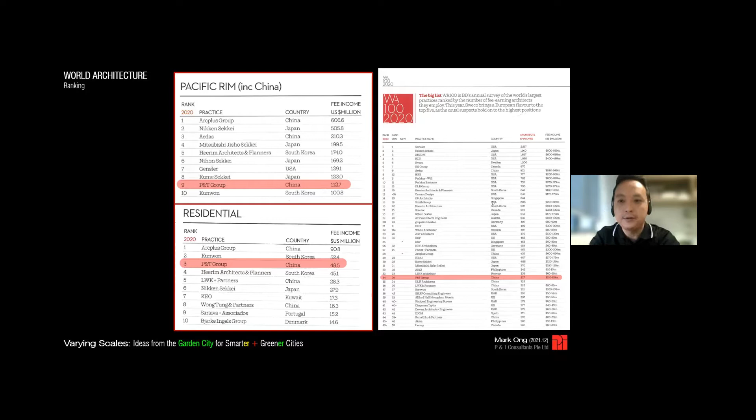So then I think with that, I'd like to start first with ideas about the city. In talking about ideas for the city, I'd like to break it down according to a few different categories. First, how we define the city.

I'd like to talk about my dirty D word. Then third, since we're doing all of this build right now in the Philippines, it's good to ask build what.

In discussing the identity of the city, I'd like to touch a little bit about heritage and identity. To start, I'd like to do a quick comparison between Singapore and Manila, starting with a question I get asked all the time.

The question is: totoo ba na ang Singapore ay kasing laki lang ng Quezon City? The answer is no. Singapore is bigger than the entire Metro Manila. What I tell people is that if you take Metro Manila and rotate it 90 degrees, you get something of compatible size to Singapore. But if you add parts of Laguna, Cavite, Bulacan, and so forth, where many people commute for work and school, it won't be difficult to put together a land area compatible to Singapore, which is nearly 720 square kilometers.

Singapore has a population of 5.7 million people, giving a density of about 7,900 people per square kilometer. That's a planar scale of measurement. If you reverse the math, you get the architectural scale: 126 square meters per person, or approximately the size of a 4-bedroom apartment by Singapore standards.

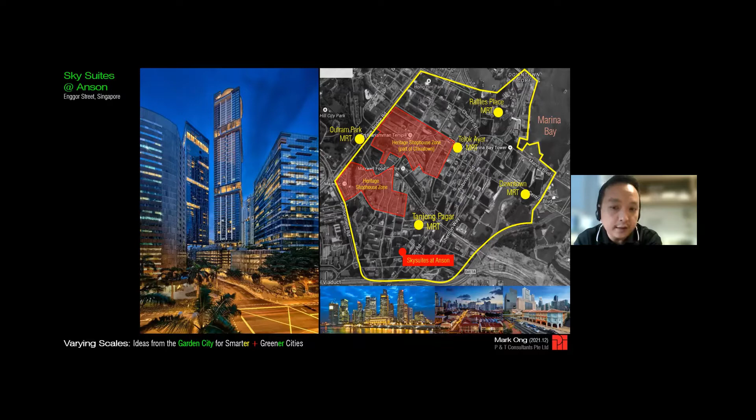So what we did was, at street level, the tower actually sits on a car park podium, which hugs the street. And what we did was we carved out one of the podium's corners to create a welcome space at ground level.

And above, we made the critical decision to rotate the tower. So the tower is rotated at a different axis from that of the podium. And we did it for the purpose of three key objectives.

The first was to give the tower's residential units a north-south orientation, no direct afternoon or morning sun. Second, to tilt the views of the tower to face the best views. And the third is to give the tower a stronger presence on the main road.

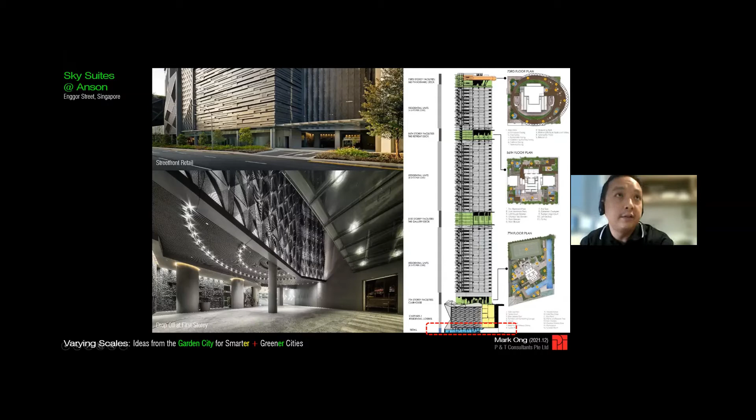Now, because of the tower's height, it's 72 stories, we designed the whole tower in section. So the whole first story is basically retail and F&B at the street in a drop-off porch.

And then at the amenity deck, we basically fit in as many amenities as we could. So we were able to fit in a 50-meter Olympic length pool. We were also able to fit in a tennis court.

And then as you go up, we basically start to introduce things like gardens, lounges, jacuzzi, spa, and basically all sorts of public areas for the residents to enjoy.

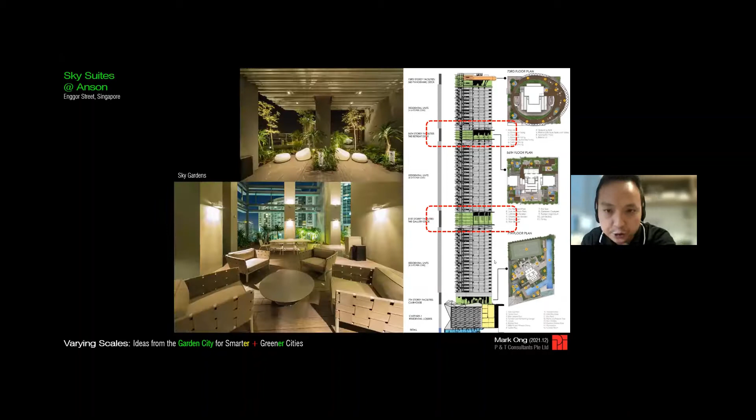And on top, we clipped this flying saucer-shaped viewing deck to allow residents a 360-degree view of the city, which is the perfect spot to watch the fireworks on National Day, on New Year's Eve, or on Formula One weekend at Marina Bay, or even some of the attractions in Sentosa Island.

So it was a project for us that was about finding the right balance of providing an enriching living experience on a human scale for the residents, but also about how such a large and tall architectural object behaves while it is around its neighbors.

Okay, so the next thing about the city is build, build, build, build, build what? We're now in this mode of build, build, build, right? So we're building roads, bridges, airports, and so forth. So I would also like to make a few suggestions of what else we can build.

And here's my first suggestion. I think we should build more parks. And I'm not just talking about building parks that tourists will visit, like Gardens by the Bay or Botanic Gardens or Bukit Timah Reservoir we have. I'm not just talking about parks like this.

I'm also talking about parks integrated with affordable housing neighborhoods. So this is Bishan Ang Mo Kio Park, right next to a public housing estate.

And it's fitted with playgrounds, outdoor and fitness equipment for adults and the elderly. What's happened is that these parks are now a regular weekend destination for families. Who says that every weekend must be spent in an air-conditioned shopping mall?

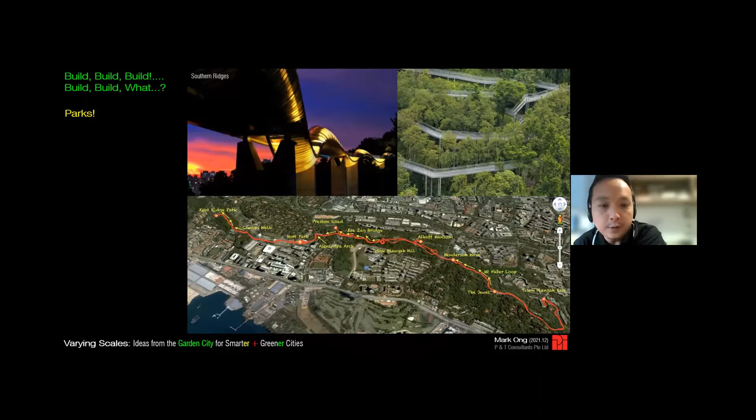In the Philippines, these are the kinds of areas we can't just leave behind. We just build subdivisions in places like this, and then later on it's the poor residents who have to suffer the consequences with flooding and all these issues. I think areas like this in our city should just be left for nature to take its course, and we can build a few things here and there to turn them into public amenities for residents to enjoy.

Yesterday, just last weekend, I was in a taxi, and the cab driver told me that to get the animals to cross, they actually took urine samples from animals in the zoo and sprinkled it on this bridge, so that animals from one side of the reserve would feel free and safe that this is really a place for animals, and they'll just go ahead and cross.

Now, why am I talking about this? These discussions on parks and public amenities remind me of one of our recently completed projects, the German European School Singapore. The school was planned around two key areas: one is a sports and recreation area, and the other is the academic block to the west.

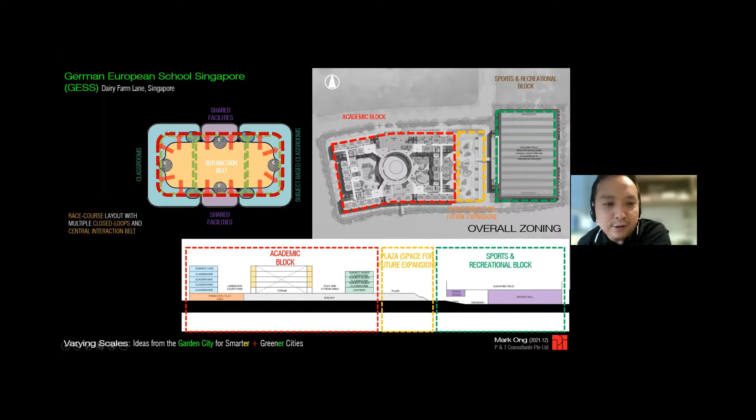I think the most interesting part of how we designed the academic block is that we used a shopping center's race course plan to inspire the design. By doing that, it allowed us to carve out a large central atrium to create a series of courtyards. Right smack in the middle, we call this space the forum, which is the main gathering space for the children. The other courtyards are used as play areas, fitted with playground equipment suitable for each courtyard, with equipment for children of different ages, creating a natural separation of children.

Now, why am I discussing this project while talking about building more parks? Here's an interesting story. When we completed this project, before it was handed over, we organized an Archi tour for staff to tour the school. One of my office mates, a colleague named Abhishek, turned up late, arriving on site sweaty and breathing heavily. I asked him a rhetorical question: what, you ran here from home, is it? To my absolute shock, he said, yes, I got lost a bit, but that's why I'm late.

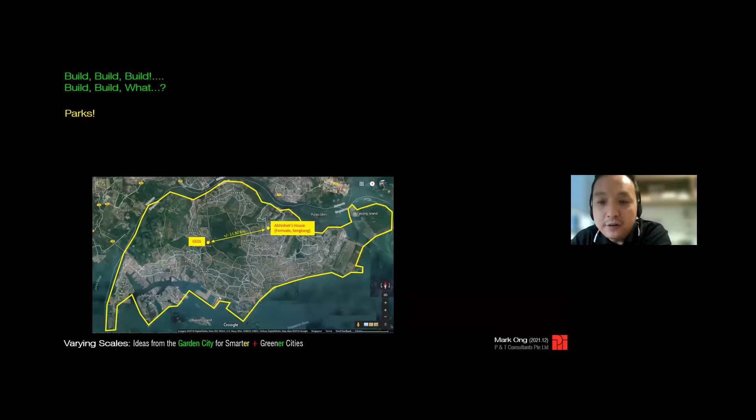Now, here's why this is a shock. To give you an idea, he jogged basically 11.8 kilometers from his house to the school. For reference, that's longer than the distance from Rizal Park to Quezon Circle. On hindsight, the thought of somebody jogging 11.8 kilometers would only probably shock an overweight person like myself.

But what is impressive was how the city enabled him to do this, because all of the city's parks are linked together by a network of park connectors, ensuring that every single home has access to green space. And it doesn't just end there. Schools like GESS, an exclusive international school, open their doors to local community groups for the use of their facilities, including their swimming pool and sports fields. In Singapore, public schools also open their gymnasiums for people to play basketball, badminton, and so forth.

By doing this, the entire island, the entire city effectively becomes a single giant fitness circuit.

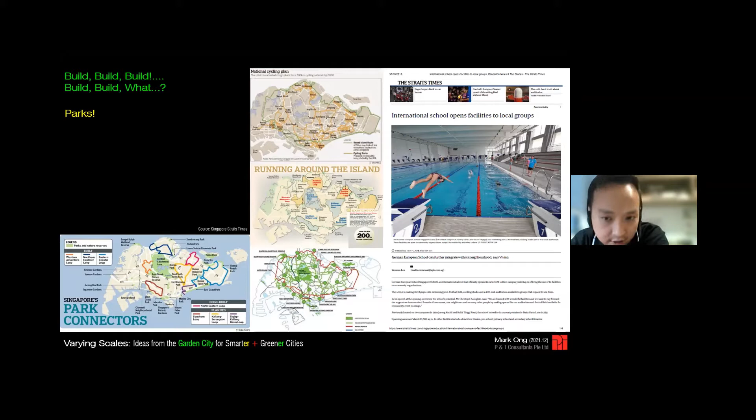So the next thing about build, build, build, to introduce the next idea on what to build next, I'd like to start by bastardizing a question I heard from an Australian architect many years back. I apologize that I don't remember his name, but I remember very distinctly the question he asked.

Which is a more sustainable mode of transport, a Prius or a Hummer? Most of us will automatically go for the Prius. But the Prius has many patented parts that come from different parts of the world to be assembled, while all of the Hummer's parts come from within a small number of kilometers from its factory. The Prius has a shorter lifespan, say 5 to 7 years, while the Hummer is built to last much longer. So really, what is the more sustainable mode of transport?

It was a trick question, of course. The answer is a bicycle. Joke lang, baka ang tatak ng bicycle is Hummer. But that's the next point I wish to make about what next to build and what next for us to aspire to build.

Which is a car-light society. In Singapore, we are aspiring to this as the government has already announced a zero car growth policy, which means we are no longer allowed to have any more cars than the number we currently have in Singapore. Because at the end of the day, this is what we are aspiring to: a developed country is not a place where the poor have cars, it is where the rich ride public transportation.

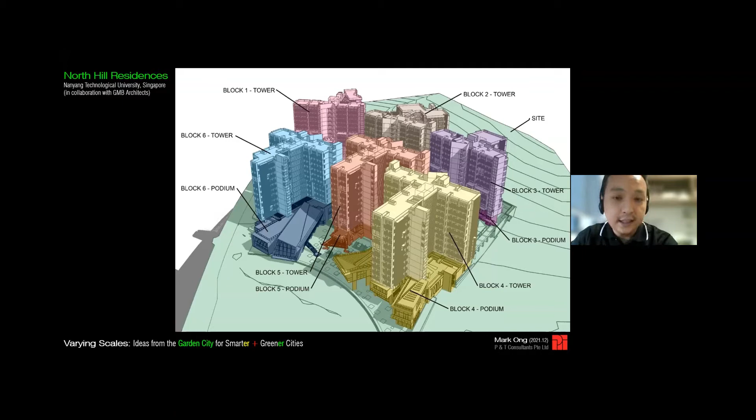The site was on sloping ground, and this is where the usage of BIM, building information modeling, as a design tool came in. How do we set the podium on the ground? What is the ideal platform level? When we use BIM as a design tool, not just for documentation, we are able to get real-time information from an architectural, civil, structural, and cost point of view on the implications of the different scenarios we explored. We are able to use this real-time information to guide the client to make these critical decisions.

Then what we did was we took the BIM model and ran it through computational fluid dynamics, or CFD, to test how the scheme responded to things like wind flow. And thus we adjusted the plans as needed to get the optimal ventilation outcomes.

When you work in BIM, it also allows you, together with your consultants, to know who really understands the project or not, who has errors in their drafting and who does not. You can find these clashes during the design stage through virtual design and construction, rather than finding out during construction itself, and later having conflicts on site.

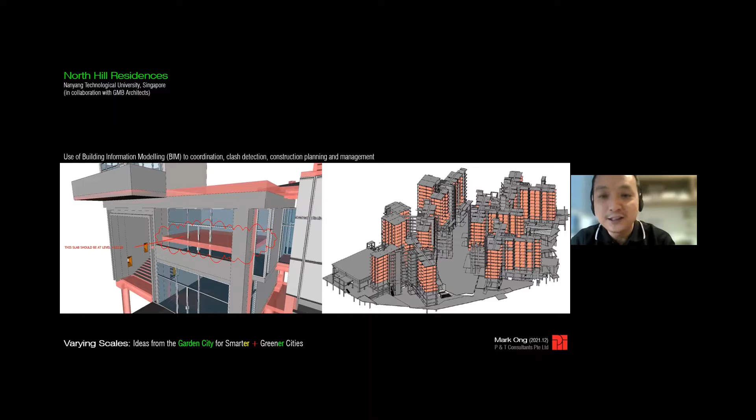So for NTU, North Hill also became the first ever application of prefabricated, pre-finished volumetric construction in Singapore, or PPVC, which is a form of DFMA.

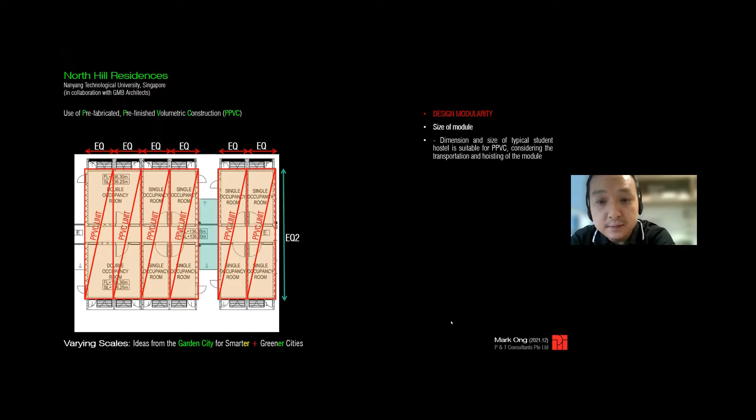But for the student apartments, we used steel PPVC, so all of these were done in steel modules. We designed the accommodation in modules, with a double occupancy room designed as a combined module of 2 single occupancy rooms. The main consideration was that each module would be within a certain size, so that we could fit it at the back of a truck, and when it's transported from a barge, if it comes by ship, or from a warehouse, we need to transport it through Singapore's roads.

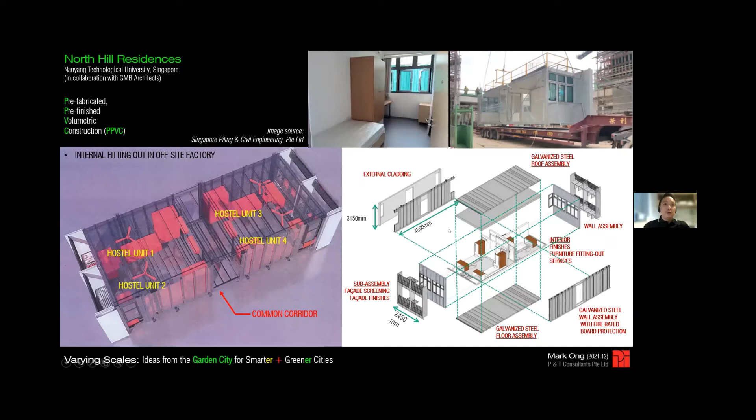We don't make it too big, so you avoid having to involve a police escort to bring the components down to the construction site. When you work like this, your construction drawings begin to resemble furniture assembly instructions. I understand the Philippines has joined the IKEA club, so those who've purchased furniture from IKEA will recognize assembly instructions that resemble this.

So these are the modules. When they come onto site, they're literally brought in three-dimensionally, completely finished with windows, cladding, floor finishes, wall finishes, and so forth. They are lifted into place with high capacity cranes. And when they're assembled, they look like this.

This is steel PPVC. Today, almost all PPVC projects in Singapore are done in concrete. I will be showing you an example of these types of projects later.

Now, 11% of global CO2 emissions come from building materials and construction. If we take a look at how buildings are made the conventional way, this is roughly how it looks. You take your materials.

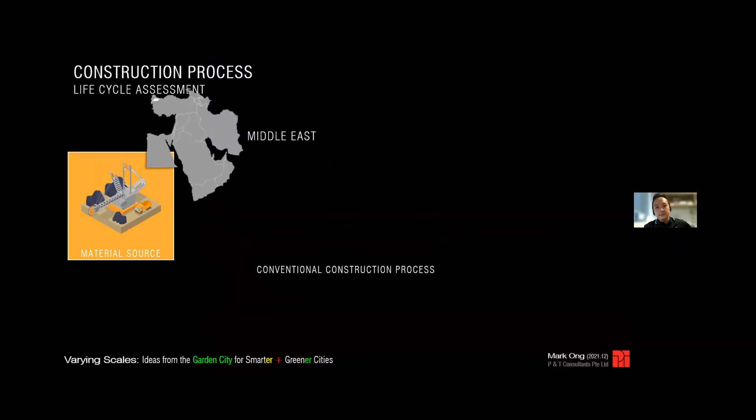In the case of Singapore, we take aggregates from the Middle East or Indonesia, and they are brought in by freight to Singapore. They need to be stored in warehouses, then transported to site, and finally you basically piece them together on a construction site. This, of course, results in things like noise and dust pollution, and a lot of wastage from auxiliary material.

Now, if you use PPVC construction, you're essentially replacing the material source with a singular overseas production process by creating the modules in one area. You normally get these parts made in Malaysia or China. In the projects we do here in Singapore, the PPVC components normally come from Malaysia or China.

You basically still need to do all of these things, but what it effectively does is drastically reduce the amount of noise and dust pollution that you have.

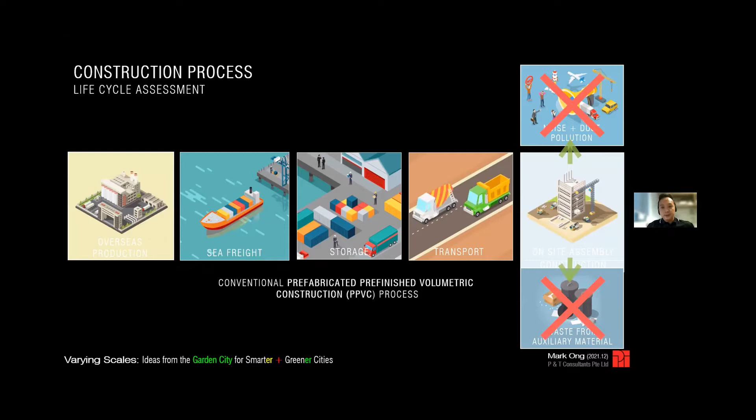So it is here where the Integrated Construction and Prefabrication Hub, or ICPH, comes in. This was our opportunity at P&T to participate in the transformation of the building construction industry towards a smarter and greener way of building.

In Singapore, our equivalent to LEED is called Green Mark. Buildings need to be either certified, or if you want to go higher, you can go for gold, or gold plus. I'm proud to say that ICPH has achieved an even higher platform. We've achieved platinum. Thus, we've called ICPH a green building to make other green buildings.

So let me just show you a quick video of what happens in this little factory.

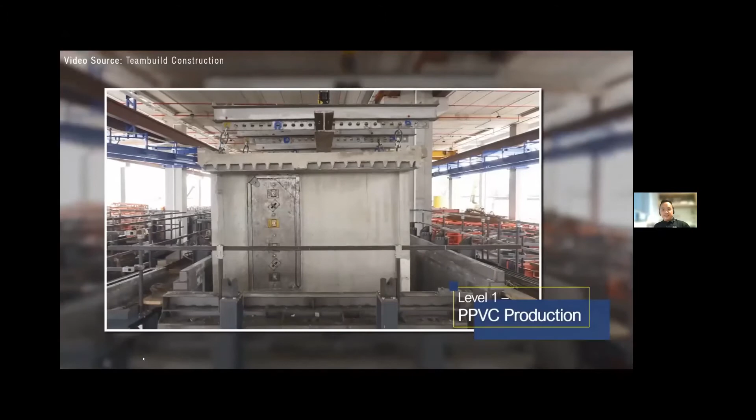So that's what happens inside the factory. You can see all the modules. NTU was done in steel.

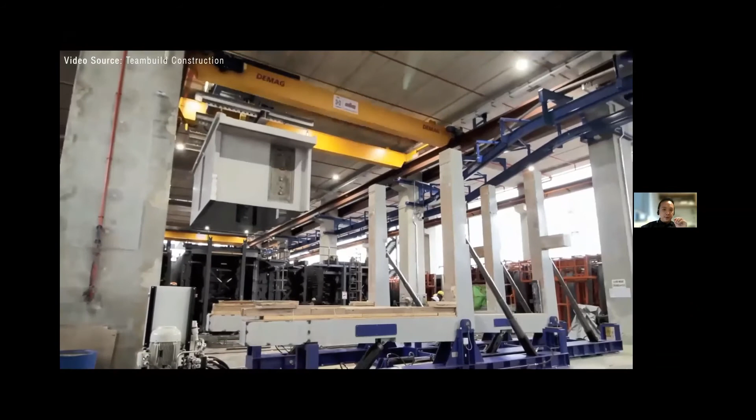Now everything in this factory is fully automated using hoists. Everything is done casting in concrete. The modules you can see are completely done three-dimensionally. We use gantry cranes, not too different from the ones you see in shipping, to transport each of the components from one part of the factory to the other. You can see here, these are three-dimensional rooms already built on a conveyor system.

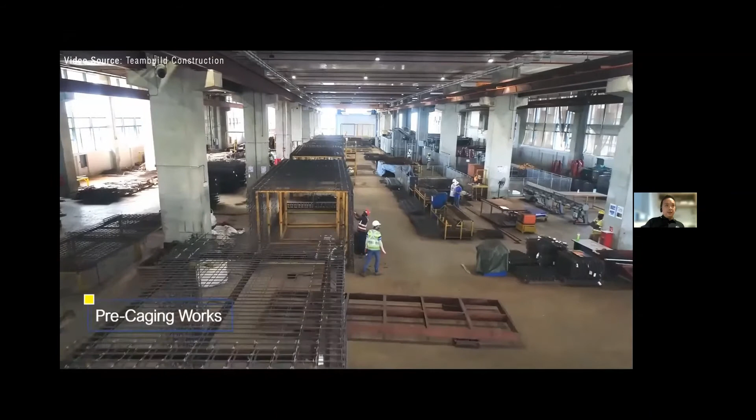And the whole thing is also done, even things like tiling is all done within the same factory, all under a single roof. Structural works like caging and so forth. And this is what the warehouse looks like.

So we had talked about earlier on controlling the size of the modules. You can see that it's almost like a library of these concrete parts, and that's how they're basically brought on from here. As it comes out of the semi-outdoor space, it's actually hoisted to the back of the truck.

Therefore, in a post-ICPH era, once you have enough of these built, we can have a much more self-sustained building construction industry. That's what we're trying to achieve with PPVC and ICPH.

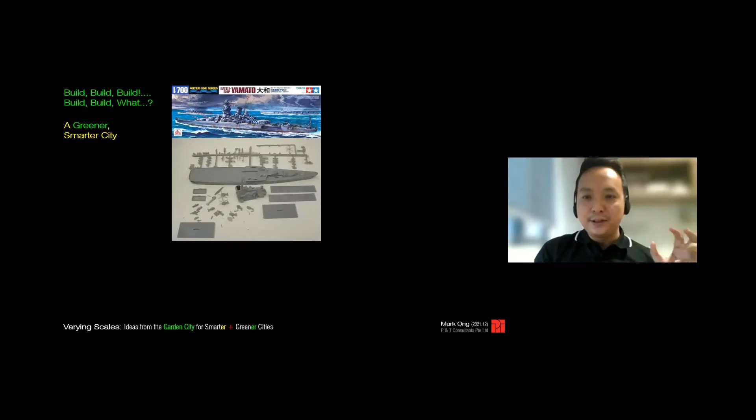Now, when I show PPVC to people, the first thing people say is, wow, parang Lego. I do think, though, that PPVC is more similar to those battleship model kits that I used to build as a kid, where you have all these pre-built, pre-assembled parts. You bring it, and then you basically assemble it for your final product.

There is another form of DFMA method, which is much more, in my opinion, similar to Lego, called mass engineered timber. Basically you have a single material, which in this case is timber, and it comes in various shapes and sizes. Then you take this and assemble it into your final product.

Now I'll show the video. In 2014, we found ourselves with the unique opportunity to use this technology on a small building for a public housing site - just a drop-off porch with a residents' committee center, that's the equivalent of a barangay hall, GFA not more than 200 square meters. The video you're watching right now is basically the 6-week span it took to build it.

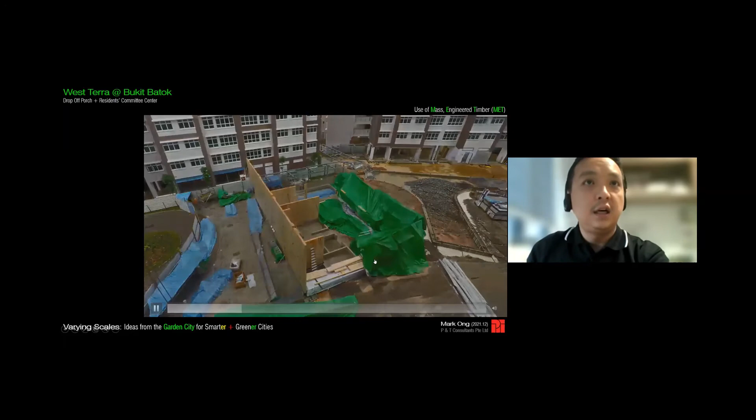You can see there, the walls, the columns are all done using timber. It's still sitting on a concrete bed, okay?

So even the beams, if you fast forward now, you can see the beams there - they're all also done in timber. And then as you cover it up, the roof is also done in timber, but of course we have to cover it up with waterproofing before we put a proper metal roof. Sidings are also done waterproofed and so forth. So it took about 6 weeks to build this.

It was almost in a way our little learning experiment using this building technology. And then a year later, we got the chance for its full application for a 5-story community center.

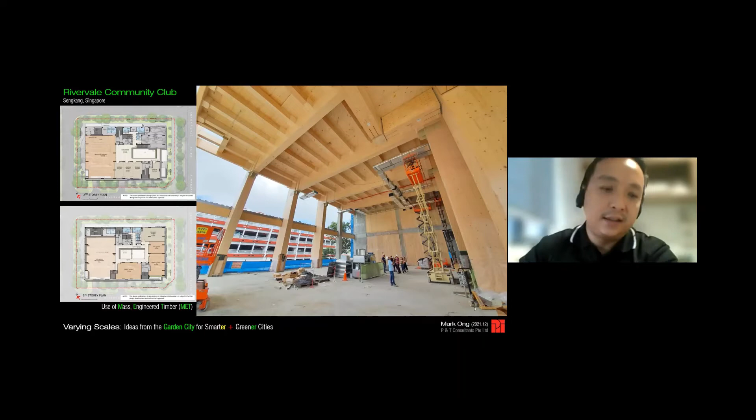The brief included very long spans and high volumes to accommodate a multi-purpose hall that on a typical day, people normally book to play badminton, or sometimes use to hold wedding ceremonies and things like that. So one of the key things for us was to be sensitive about how to apply or use the technology in the local context.

Our supplier was from Europe, Austria, and we were building in a tropical context. So we took measures to ensure no timber members would have contact with the ground - you can see the entire first story and the basement was completely done in concrete. But because timber was also a combustible material, we also had to adapt the technology to local fire codes, so all exit staircases were also done in concrete.

So you actually had a building with a lot of interesting interfaces between this material and the structure that's in concrete, and we learned a lot of lessons. This is the building as it was coming under construction, and this is actually the first talk where I can show the completed photograph of the project - previous talks I could only give the construction photo. We completed it thereabouts during the pandemic.

Here are the spaces internally where we also try to celebrate the material - you can see we expose it as much as possible. This is that double volume long span structure I talked about, with retractable seats on one side since it's also used as a multi-purpose hall by the community center. These are technologies we've been experimenting with, to try to build greener, more sustainable, and smarter here in Singapore.

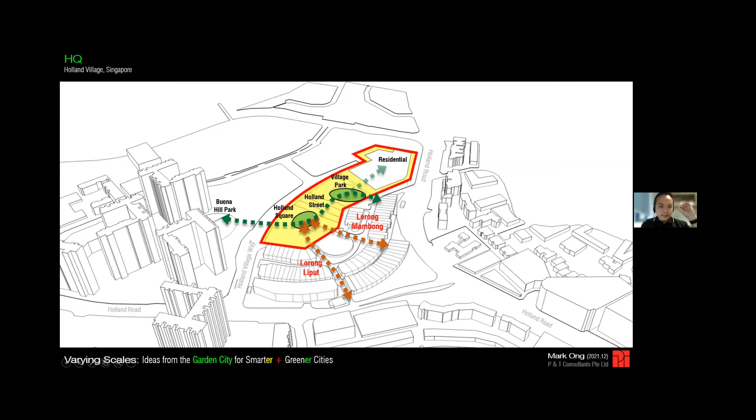One we thought about as a plaza, the other as a park, and then we linked it with an internal pedestrian street. We wanted to replicate the scale, proportion, and streetscape of the existing Holland Village and extend it into the site.

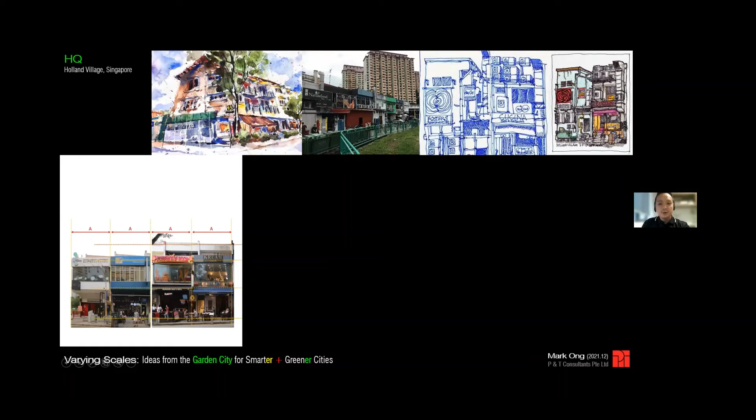So what does this thing look like? The buildings in Holland Village had this charming messiness—each shop had its own look and character. If you take a look, they're all different, not unlike the places I mentioned. So we wanted to do something similar: similar scale and proportions, but applying different materials so it feels very rich. We called it a beautiful mess.

We wanted these spaces and streets to integrate and merge with landscape, so above the shop houses we introduced greenery. And since you still need to fill in all the area requirements from the client, we sat all of the big items above. So the key idea was to take the vibrancy of the streets of Holland Village and apply it into our own site.

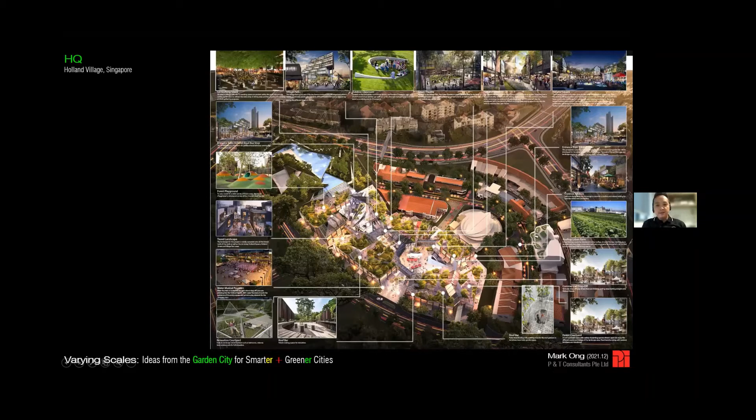We thought about how places like the public plaza would be used at different times of the day—during the day, and then at night you can have things like light, bring the food trucks in, so it becomes a much more vibrant place. The park works one way during the day, then differently at night.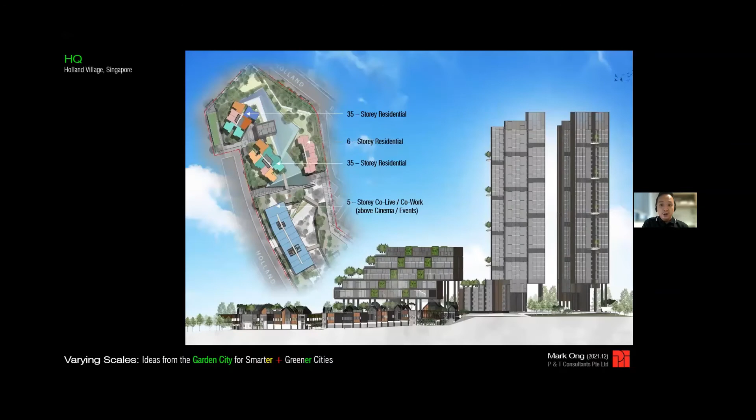You still can't run away from the fact that you need all of these big commercial spaces, so we put them up on stilts. The idea was that you'd have fine-grained 2-story shop houses below, with the coarser big box items basically hovering above.

We tried to shape and sculpt the massing of these buildings. For example, this big box contained theater, event spaces, co-live and co-work spaces, and we made the effort to create a terracing form where you can use it as outdoor meeting areas for the co-work spaces, break areas, and so forth.

When you link all of the roofs of these shop houses together, we also proposed a bridge that went across the street and linked to the adjacent hill park. Here you can also see we tried to apply a similar principle for the residential towers, where they're lifted up off the ground to allow the landscape to crawl underneath.

Next, I'd like to talk about the town scale, where I'd like to talk about housing. We've done quite a bit of work in public housing over the past 10 years, and the way these towns respond to what I like to call the greens and the blues.

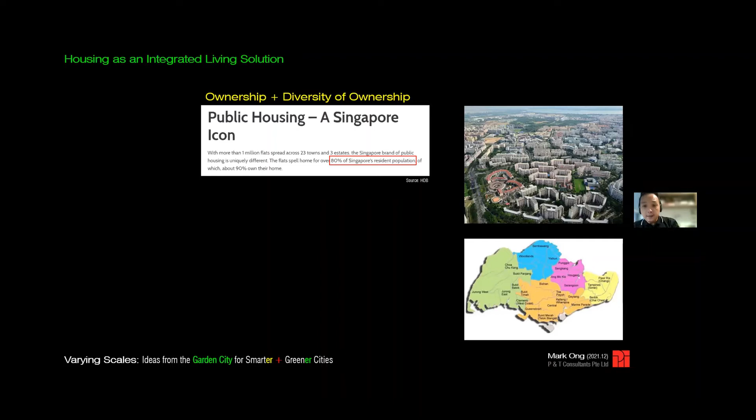I like to tell visitors who come to Singapore that places like Orchard Road and Marina Bay, that's not the real Singapore. The real Singapore can be found in the HDB towns, developed by the Housing and Development Board, Singapore's public housing agency. In 60 years, they have developed 23 towns all over Singapore, and within these 23 towns, more than 80% of Singapore's resident population live. Singapore has the third highest home ownership rate in the world, of which more than 80% is public housing — it is impossible to deny what an achievement that is.

For Singapore, public housing has been transformative both to the development of the city and the building of the nation. One of the key points I wish to make regarding housing in Singapore is how it is viewed as an integrated living solution.

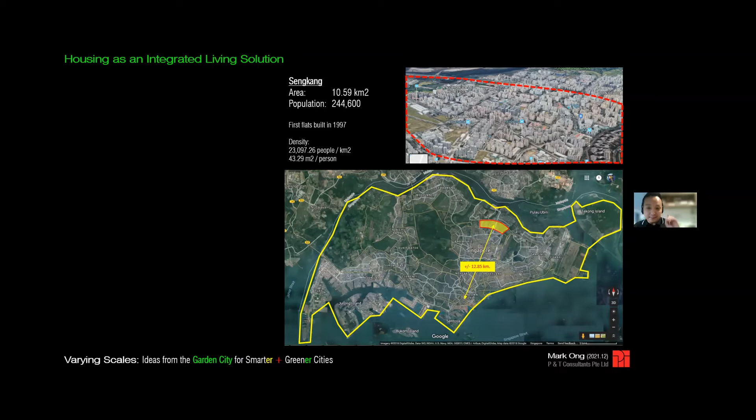To illustrate this point, let me share about the town I live in, from where I'm doing this webinar. It's in a town in the northeast of Singapore called Sengkang, about 12.85 kilometers from the downtown core. The density of Sengkang works out to about 43 plus square meters per person — remember, I said Manila is about 48 square meters per person. For reference, it's comparable to projects 6 to 8 in Quezon City in its distance to the CBD. Here is Sengkang side by side with Quezon City project 6 to 8 — comparable in size and distance.

Now, let me illustrate what I mean by the integrated living solution. Amongst the different types of housing in this town — public, private apartments, landed houses, etc. — here's how it's been planned. Here's the boundary of the town.

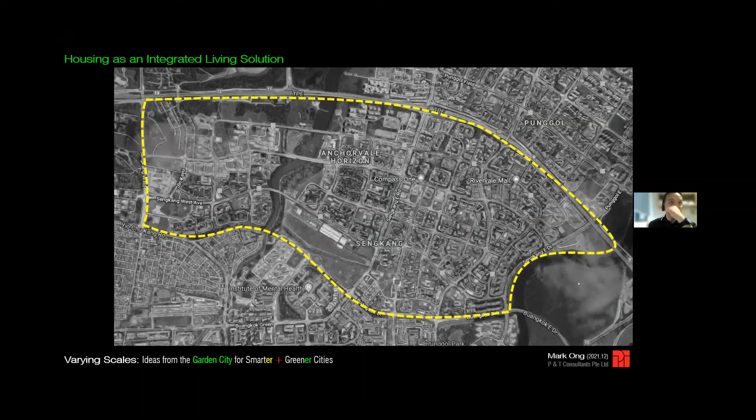You have an MRT line running north-south through the town, with the train station in the middle, and a light rail network that serves the entire town. Then you have the rivers and waterways, maintained by the Public Utilities Board. You have parks, many of which are next to the rivers, maintained by the National Parks Board. You have public schools, secondary and primary.

You have a library, and another set of green spaces managed by the Housing and Development Board. You have community centers — I was showing you Rivervale a while ago, this is where Rivervale is. You have a hospital, then places of worship — Chinese temples, Indian temples, churches for Christians, because Singapore is a multi-religious society. And then you have neighborhood centers where you can get daily provisions like supermarkets, places to eat, and so on.

This illustrates the idea of housing in Singapore. The idea of housing should not be just about pabahay — fundamentally, it should be about pabuhay. It should answer questions like: how do I go to and from work? How do my kids go to and from school? Where do we go for recreation? And so on. That takes us to the next part, which is the greens and the blues.

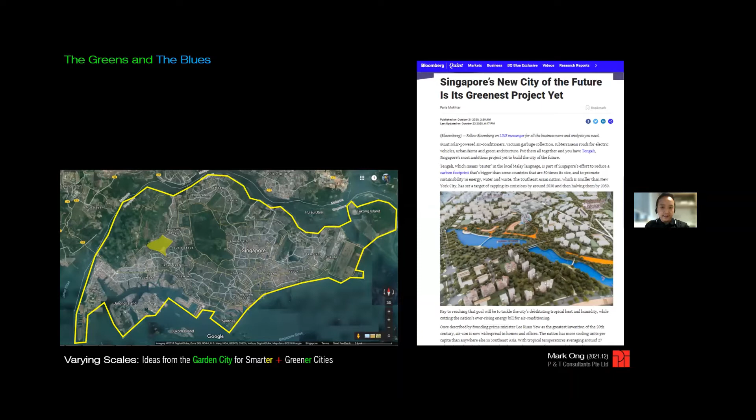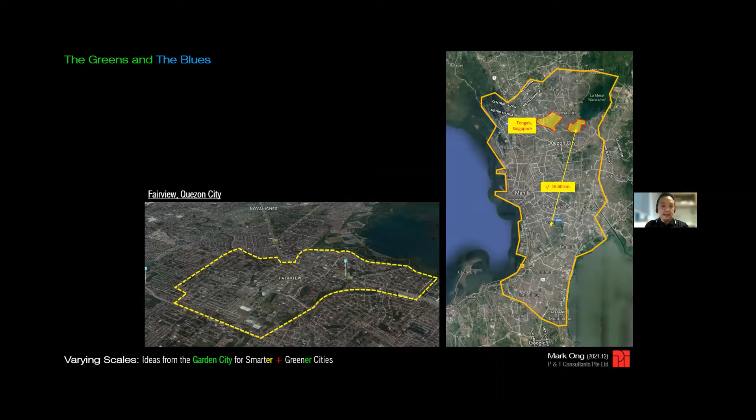I'd like to share briefly about Singapore's newest town, called Tengah. The media have called it Singapore's greenest project yet. It's about 7 square kilometers in land area, and when completed, it will contain about 42,000 housing units, most of which will be public housing. The town is about 16.6 kilometers from the city's downtown core, making it comparable to Fairview in Quezon City in terms of distance to the CBD, which is Makati. Size-wise, it's a bit smaller, so you can compare the two.

It's not too different from the fact that Fairview is actually not too far from the La Mesa watershed. And here's the other thing: you actually have a network of linear parkways that link all of the greens and the blues together, and each of the individual plots of land are basically plugged into one of these parkways.

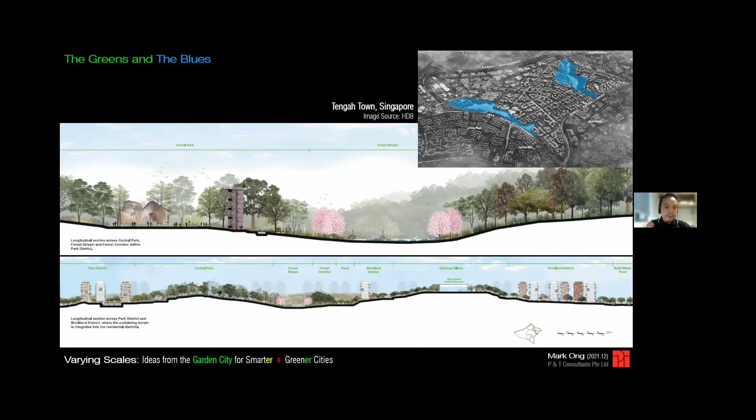And then the parkways play the critical role of linking all of the green and blue elements together. They are the green activity corridors for people to walk, jog, cycle, and have community activities on the ground. But beneath, they also feed the water bodies with their stormwater runoff, so that's another purpose of it.

And then the town center itself is designed as what they call a car-free marketplace. The master plan has been announced to the media and put up for public exhibition, so it's a very transparent process. You can't say afterward, 'I thought there was supposed to be a park there, why is there suddenly a house built where a park should be?'

Now in 2017, we were given the opportunity to work on one of the first public housing sites in Tengah. It is this wedge-shaped plot at the southeastern area of the town, in a neighborhood they have designated as the Plantation District.

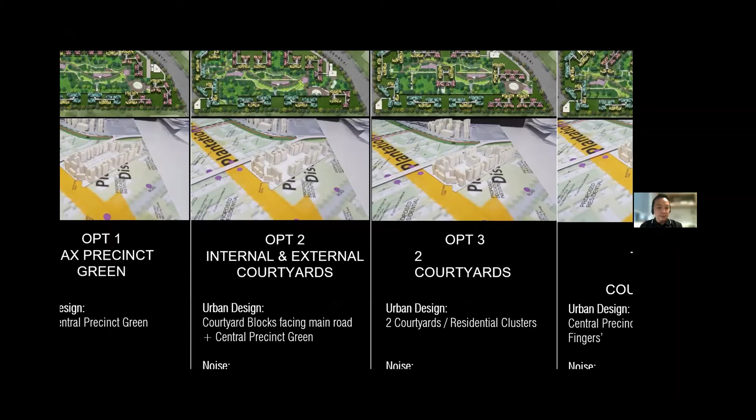So when we develop site planning options, I'll do a quick zoom in. We normally start with models, so they're very tactile. What we normally do is build the models, just take foam board, paste it, get the density right, and then we play Godzilla. We basically twist and turn the models around to try to see what are the best possibilities.

It's only after we do all of these physical models that we do the virtual model. And the important thing about the virtual model is not so you can do a perspective in SketchUp, it's so you can test the idea for certain performance standards.

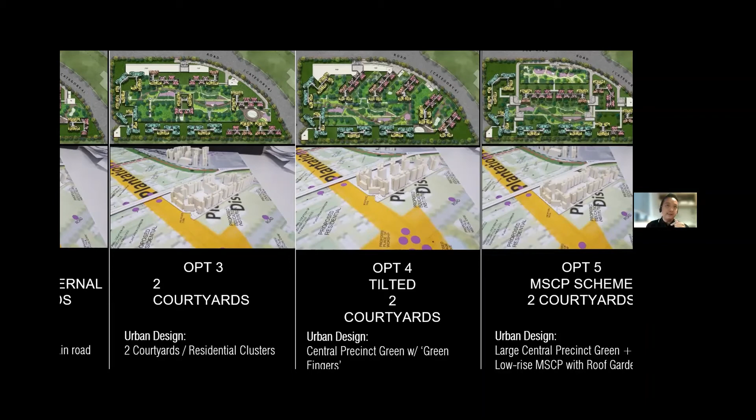In our case, our site, as you can see in the model, has an MRT viaduct running through it. Our key criteria for this project was how to mitigate or minimize the impact of the noise from the viaduct on the project itself. So we ran it through simulations, and the scheme that eventually won out was the one that tested best in terms of buffering the noise impact from the train station. That dictated our site planning approach.

So here you have the MRT, and this is one of the farmways I was talking about. The idea was to place a multi-story car park facing the MRT to buffer off the noise, and then carve out the greenery as an extension or branch of the linear farmway. Only after all of these negative spaces, or green spaces, are established do we place the building.

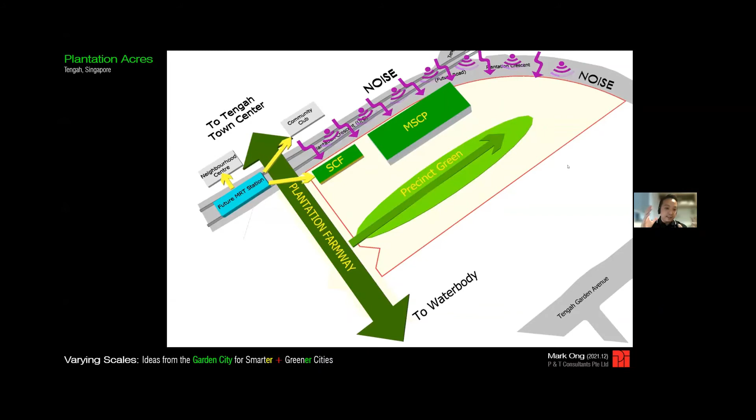So we laid out the building and then started to break it up into different courtyards to define the spaces a little better. Here we opted for a design with two linked courtyards, and then we played around with the massing of the building. That led to the site plan, where you have two courtyards linked to each other with a multi-story car park in front.

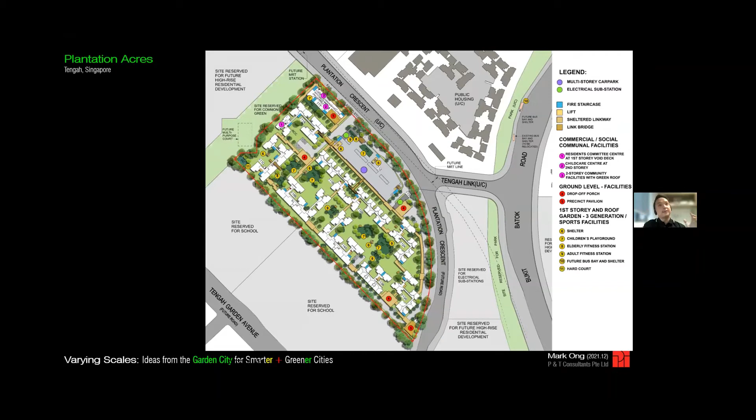This is a public housing estate that is fully open—no fences, no walls, no gates—so we expect the public to be able to filter through the ground plane. The MRT station is here, with an adjacent bus stop. So we created a network of sheltered linkways for people to move weather-protected and barrier-free, which is our term for handicap friendly, connecting from the bus stop to the MRT station through the park environment of this public housing estate. Now, a while ago I was talking about building a car-light society.

We asked ourselves: we're building a public housing estate next to an MRT station, and this multi-story car park is going to have hundreds of cars parked in it. Logically, residents of public housing next to an MRT station would probably be the first to let their cars go. So we designed the multi-story car park so the first story is configured to be activated in the future, converting the space into a community facility—maybe a childcare center or a senior activity center, and so on.

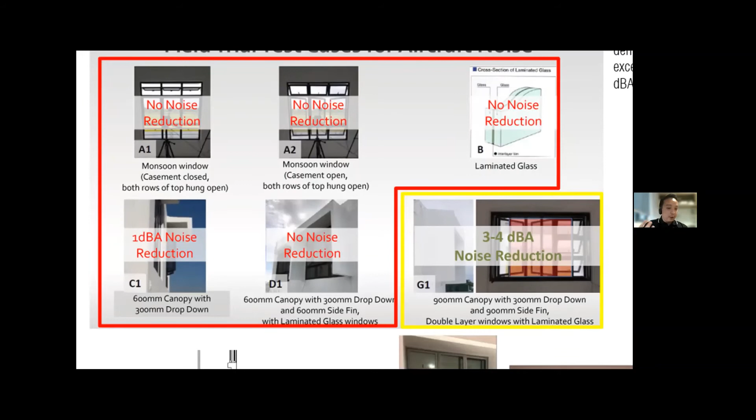Now, the other challenge about Tengah is that it's not too far from the airbase, so the housing board started worrying about noise. They tested physical mock-ups of units to figure out what window configuration would reduce noise. Their standard was that windows still needed to open, so people could use natural ventilation. This required double layers of windows—two sets of window panels—plus a side wall and a very heavy-looking canopy. That became a requirement we needed to use on the project to mitigate noise from military aircraft near the airbase.

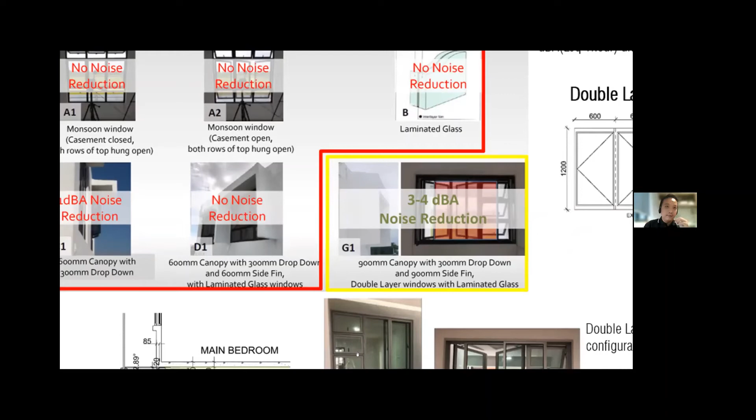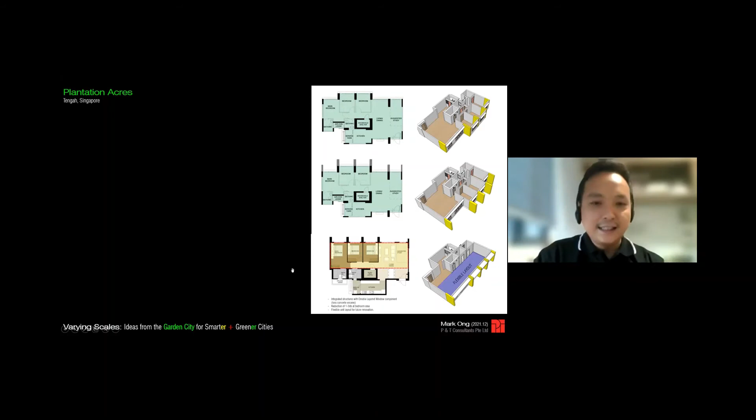So we started playing around with this, because we weren't happy that the building would look too heavy if we used that approach. What we did was take the columns normally inside the unit and push them out, so these columns become the side wall of the window—that's one function. But the columns can also structurally support the long canopies required as sound barriers, so that's double purpose. By pushing the columns out, we reconfigured the plan so the entire space inside the unit is column-free—triple purpose. And if you look at it in section, it actually acts as a sunshade, so that's four-in-one. But we weren't done yet.

We used this to create the facade concept. Recall I said we were designing this in a neighborhood that needed to follow a plantation theme—so we took inspiration from the very regimented appearance of plantations and applied a grid to the facade. That generated the overall facade concept of the project.

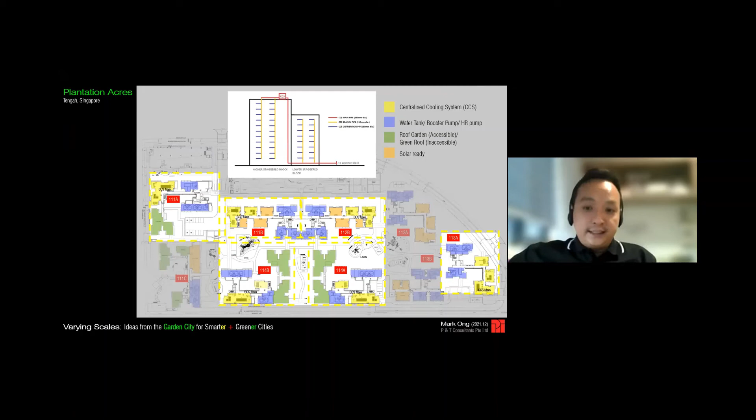Plantation Acres will also be one of the first residential plots—never mind public housing—to adopt a centralized cooling system similar to office buildings. The basic principle: some blocks will have a chiller plant on the roof, and chilled water travels through the linkways connecting all the blocks. We had to reconfigure them to accommodate the size of the big chilled water pipes running through. The system is expected to cut energy use by up to 30%, with emissions reductions equivalent to 4,500 gas-powered cars.

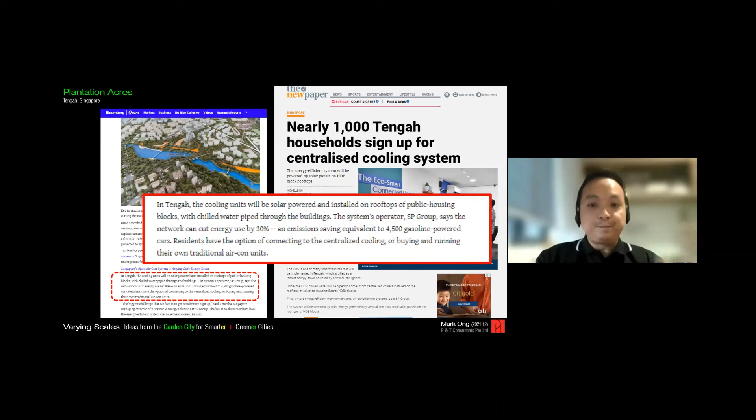So as a homeowner, you can either go to the furniture store and buy your own aircon system, or sign up for this centralized system and just plug in to have aircon. The take-up rate has been very encouraging. So this is what the project looks like now.

It is under construction. Okay.

Next, let's move on to the neighborhood. At the neighborhood scale, I'd like to talk about lungs and permeability. To discuss this, I'd like to go through one of our projects and how this impacts the neighborhood scale.

Recently, the Housing Board in Singapore announced plans of adding a neighborhood into a town here called Tampines. The neighborhood would be organized around what they call a boulevard park, which would link all the way to their town center. In 2016, we won the design competition for the largest park-facing parcel of the neighborhood, which will have nearly 2,200 units.

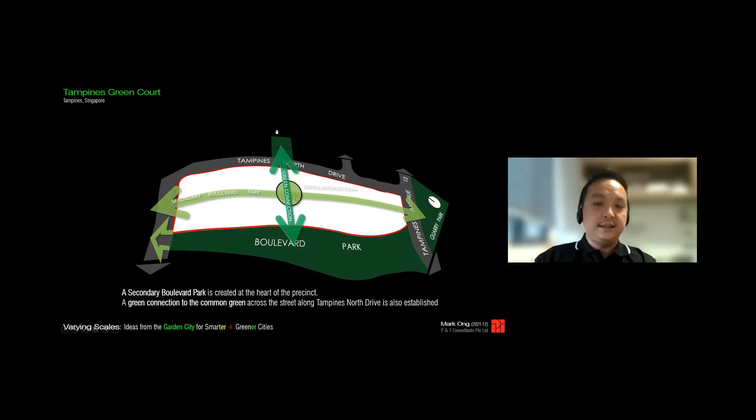With one side of the site already having over 600 meters of frontage to the park, we said we'll introduce our own internal boulevard park, and then create another green connection that basically bisects the site. We didn't want it to be just the green space, we wanted it to be a proper space defined by buildings.

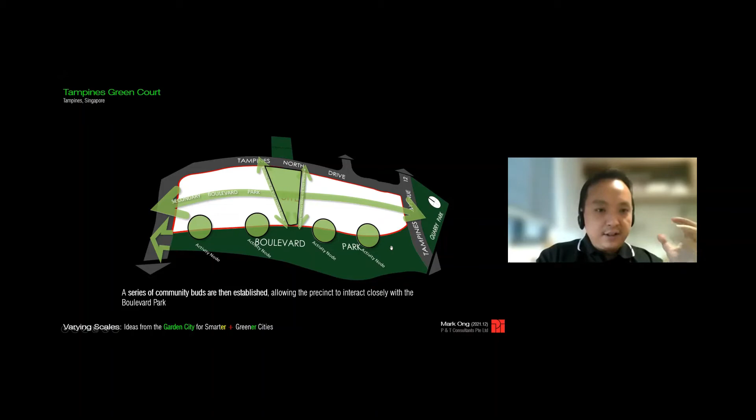This space would be defined, and then the other thing we thought about was how do we manage the relationship between our site and the boulevard park. So we thought about this idea of having activity nodes, defined by introducing clusters of buildings that embrace these nodes.

From there, if you're taking your bicycle or jogging along the boulevard park and going home, you basically enter through these nodes, which take you back to the clusters of buildings further behind. When we shaped it in 3D, we felt each one should step down, from a maximum height of 14 stories down to about 5 stories.

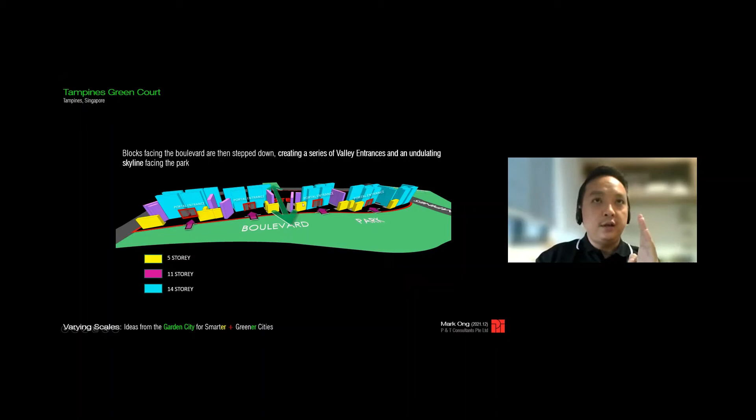As you go through, each one will basically have a portal, and when you enter it, you enter a double volume community living room space, like a lobby. That's how you go home if you live in this block. Or if you live in the blocks behind, you can take the landscape staircase through the gardens, elevated gardens at the back.

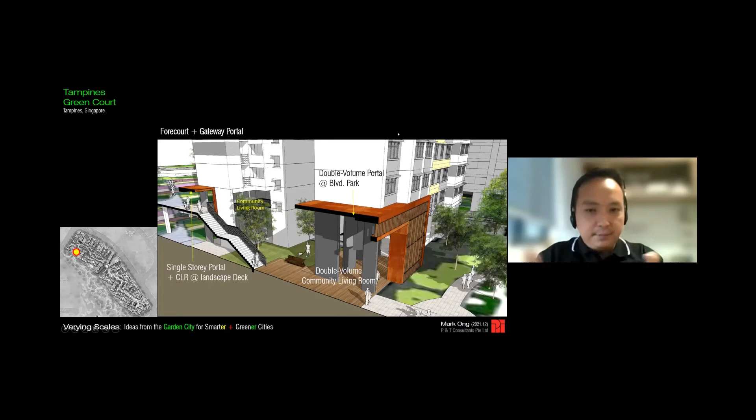Here at the back is car parking. Or if you're feeling lazy, you go to this block and take the lift up to get there. Because the site is very, very long, about 600 meters, clustering is very important, so we applied a color code so you have a sense of identity.

We tied this together with the landscape architect, Site Concepts International, who have an office in the Philippines. The landscape designer for this project is also a Filipino architect, and I enjoyed my working experience with him.

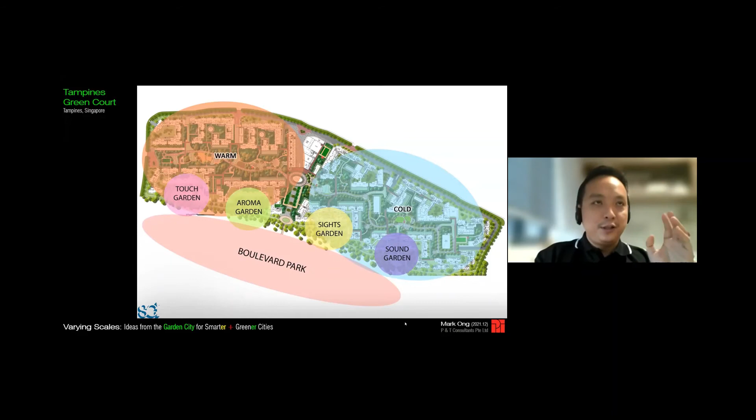He introduced a different theme for each of these nodes, even in the landscape selection. So as you go through each node, you have different plant species. Each place looks different, has a different color, a different smell, a different experience.

Finally, the last thing I want to talk about at the neighborhood scale is the creation of walkable and bikeable neighborhood streets.

In Singapore, that's not allowed. Every site is designated a single point of ingress and egress, and that's the only point where cars can come in and out.

If you need any kind of vehicular circulation in your site, you have to provide it completely separate from your road access, and the LTA decides where your road access is.

Apart from that, you're also required to provide what's called in Singapore a green buffer. The green buffer width is determined by the category of road you're fronting. Sometimes it needs to be wider, minimally 2 meters, sometimes 5 or more. What you put in the green buffer is also controlled by the planning authorities. For instance, if you have cable services running underneath it, it must be below 2 meters, because they want a minimum of 2 meters of soil depth so you can plant trees. The species of trees must be submitted to the National Parks Board because they want shade-giving plants.

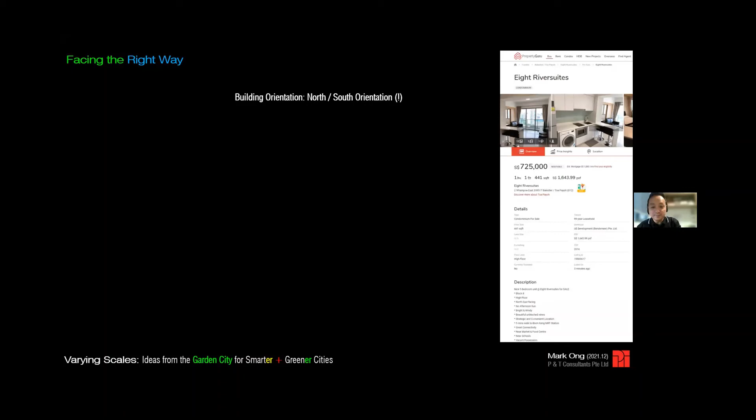A guy is selling his one-bedroom apartment, about 40 plus square meters, for 725,000 Singapore dollars, that's about 26 million pesos. Yes, property here in Singapore is that expensive. But let's look at the selling points: high floor, block 8, the number is said to be lucky, bright and windy, and it also includes no afternoon sun. So this is already integrated and embedded into the values of the property market.

And I think that is very, very important if you want to talk about living sustainably and making people less reliant on air conditioning.

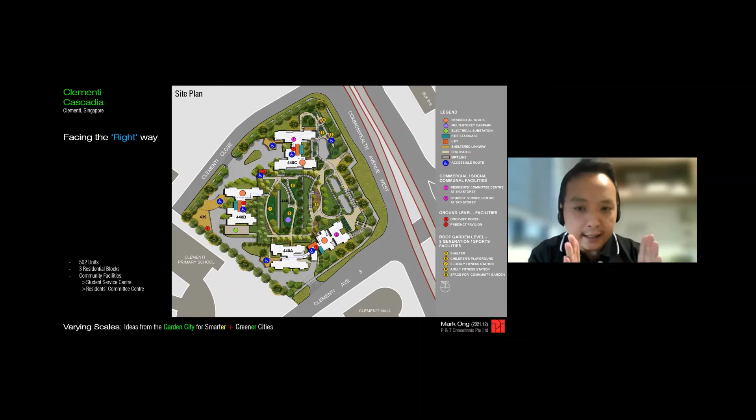Now, from here, I'll take you to a project we did, another public housing project called Clementi Cascadia. You can see the buildings are predominantly north-south in orientation. But I'd like to highlight another principle we keep at heart, and that is people first. For those who have been to this part of Singapore, this intersection is a very prominent corner because it's right next to the town mall and the MRT station, one of the most distinctive corners of the site.

If you're an egomaniac architect, you'd say, I want to plonk an iconic landmark building here. We wanted to stop ourselves from such impulses. We said this space must be an open space, a receiving point for residents walking home from the MRT station.

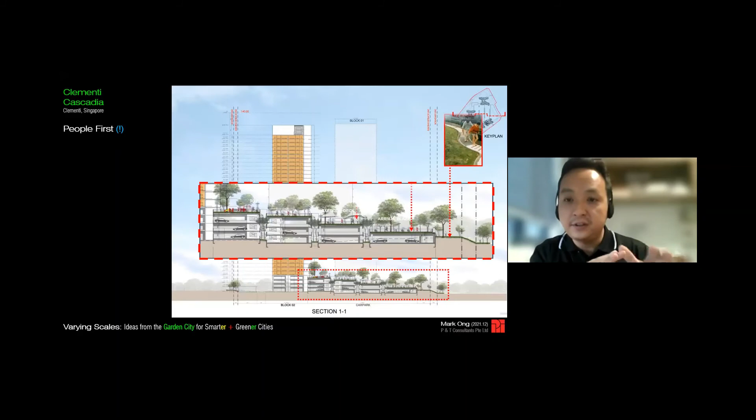To do that, we needed to sculpt the multi-story car park, because below all of this is car parking. So we designed it by burying the car park underneath, as a series of landscape terraces linked by ramps and staircases, so as you walk from one tier to the other, you encounter different recreational amenities in the landscape.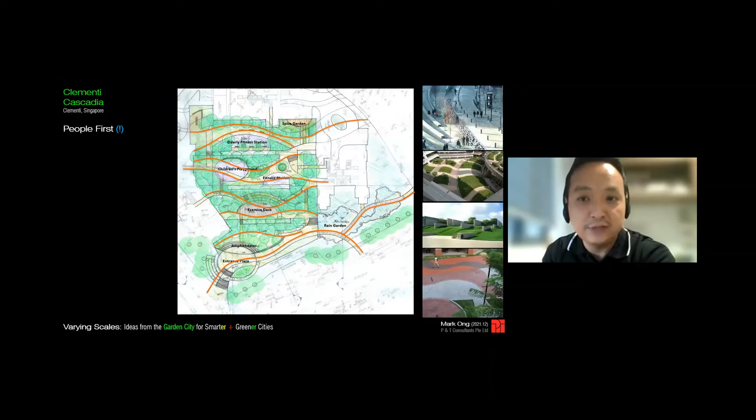We worked with a landscape architect, also a Filipino landscape architect. The idea was to soften the edges of the car park, using the ramps and the staircases to create those soft edges.

And here's a thing about design inspiration. What we did was we took inspiration from the site itself. One of the things we noticed about the site was that the site's topography actually swirled. It wasn't straight. The topography actually swirled upwards.

There's a pretty interesting thing about this site, so let's reflect this thing that nobody will see on the ground in the skyline. That's why the buildings actually have that kind of swirling skyline, and we tried to exaggerate it by sloping the roofs to express the idea. We tested it first with scale models. This is the project launch perspectives, and this is the project completed.

Now, from here, I'll go to the principle of buildings that breathe. First, I'll talk about our applications of it in public housing. You'll notice that in public housing, we have no choice but to control the amount of glazing that we provide, so what is important is how and where we provide it.

So what we do for public housing is, if you look at it, we basically provide a 500mm canopy jutting out. Then you have an operable casement window, and above it, you have a top-hung window.

The reason why we use this detail is that homeowners who opt not to air condition their homes can, on a rainy day, kasi ang kawawa, parang sayang naman, malamig yung panahon, rainy day, pero you can't open the windows kasi papasok yung ulan. So the idea is on a rainy day, you close your casement window, you open the top-hung window, you get weather protection unless the rain is super crazy. Most of the time you're able to allow the breeze to come in, and you still have enough weather protection.

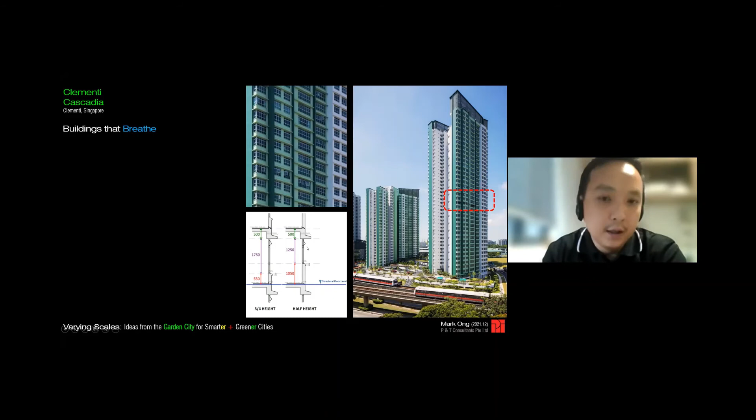So you apply this to all the unit types in this particular project. Now, this idea of buildings that breathe, we took it up one step to the extreme in a project we did in 2013. It was a finalist in the 2013 World Architecture Festival Awards. This is Ascentia Sky, a private condominium here in Singapore.

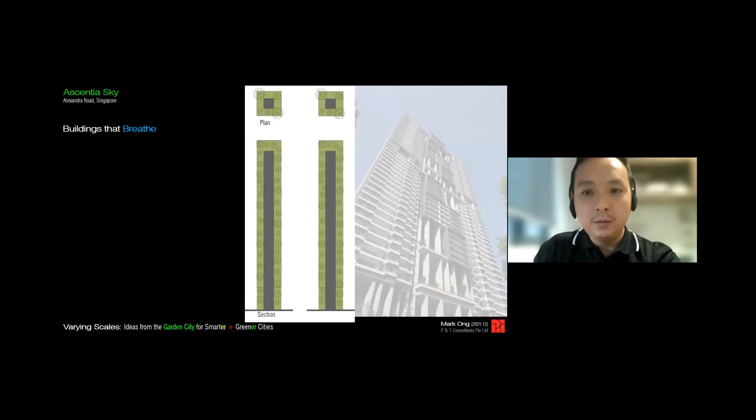What we did was we started this idea of doing 2 conventional towers with stacked units, that's the plan, that's the section. Then we started to insert units in between the towers, and after that, in the space between these units we inserted, we started to insert gardens. To give you a detailed plan of what this looks like, I'll show you.

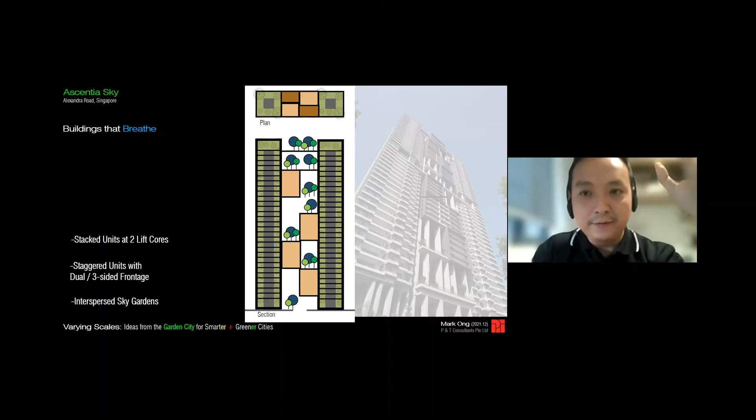You have this variety of spaces as you basically climb up and crawl up the building. And so the result in section, you get a building where you have these various gardens inserted at various levels.

So we did a calculation. Our tower footprint is about 2,032 square meters, which means that by putting the tower, we deprive the site of 2,000 plus square meters of greenery. But with more than 5,400 square meters of green space added through these gardens, I'd say that we more than made up for it. So these are what the gardens look like today.

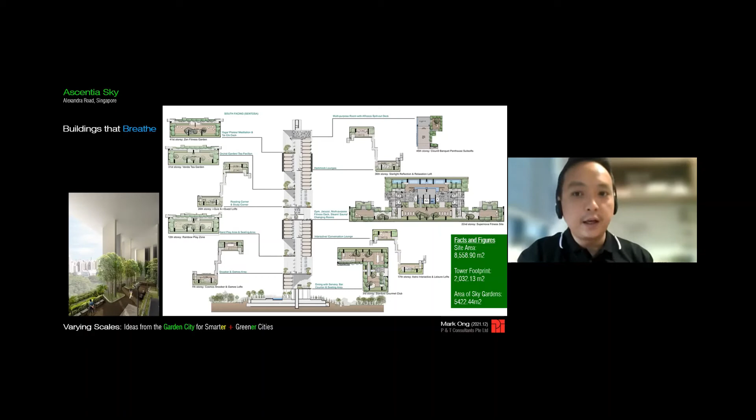And designing the facade was not difficult. We just had to express these boxes, these modules that we basically inserted through.

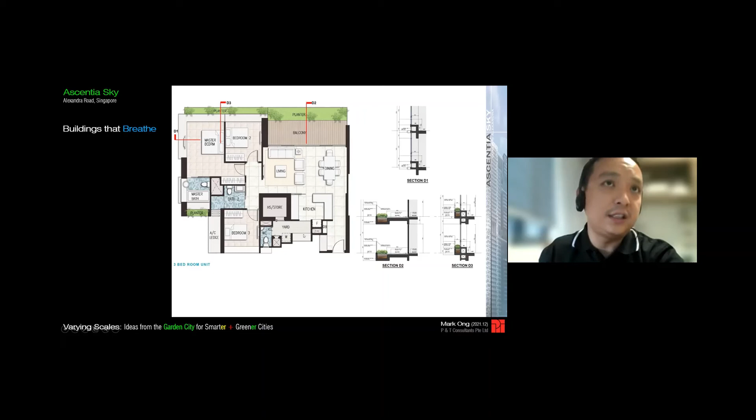And then this idea of buildings that breathe, we basically also took it further. So even things like service areas, bathrooms, which I think in most apartment designs we leave to mechanical ventilation - we've naturally ventilated bathrooms, kitchens, and clothes drying yards and things like that. We basically naturally ventilated these kinds of spaces in this building, and that's Ascentia Sky.

The next thing I want to talk about is touching the ground lightly. This is more about trying to be as respectful to the natural assets of a site as possible.

I'm reminded of this. This is Bartley Residences. This is one of the most technically difficult projects that I've worked on. It was difficult because, number one, the profile of the site was very uneven. And the second was because the site had a natural topography difference of about almost 20 meters from one end to the other. And then we found out that we had a 147-year-old tree in the middle of the site.

The National Parks Board told us we are required to preserve it. The tree was so sensitive that the consultant team needed to have an arborist on board for the project. And before the site was officially handed over to the developer, the National Parks Board brought their own arborist. So our arborist and their arborist had to go to the tree together, inspect the tree together.

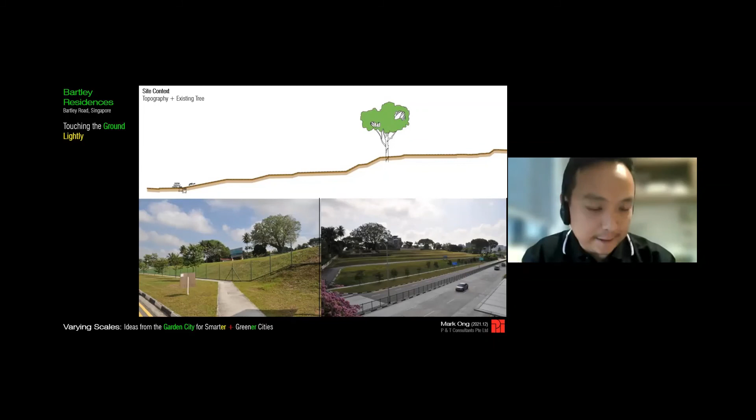They spoke to the tree in their own tree language. But the goal was essentially to establish that the tree was in good health. And therefore, if anything happened to the tree, we would all be in trouble.

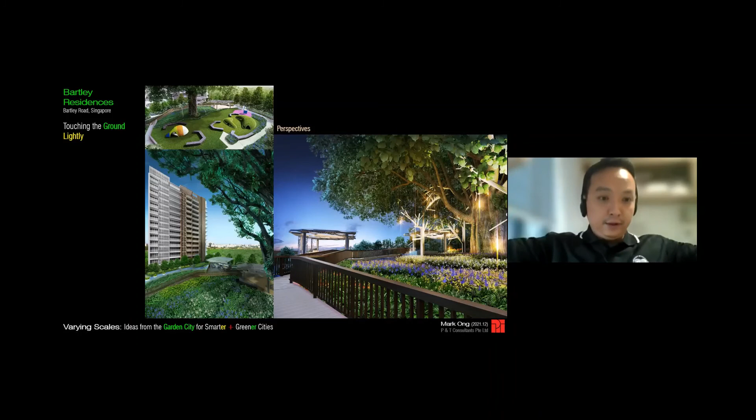We envisioned putting the children's playground underneath the tree because the tree canopy was so wide, it could cast a shadow and it would be comfortable to use that space every time of day because of the shading you got. And so what had to happen was that all of these footpaths needed to be ramps because of the topography.

Anyway, to cut the suspense short, here the tree is - it survived, okay.

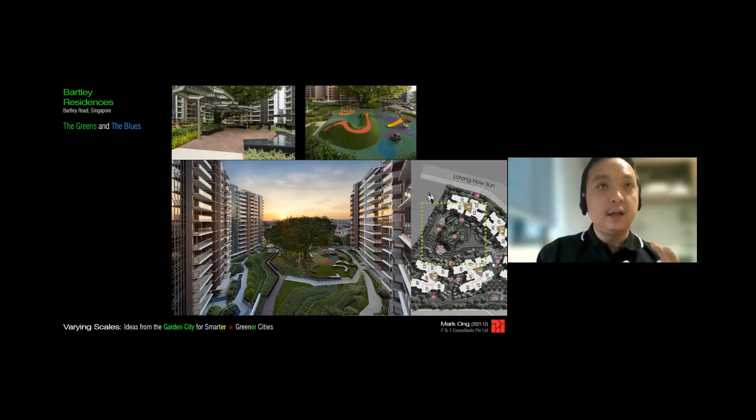You can see here how we tried to be respectful with the terrain. You can see the apartments here, these buildings are sitting at a significantly higher level than this. So the first story apartments here basically are looking at a sunken landscape courtyard. You can see here, we had to do the landscape in tiers.

The challenging part was managing the topography, and basically, as you can imagine, the solution that we adopted was to have a 25-meter no-build zone around the tree. So the car park basement is a very, very interesting floor plan that unfortunately I'm not allowed to show you guys.

So the next thing that we needed to do, of course, was to use the topography of the site to create a very, very interesting experience.

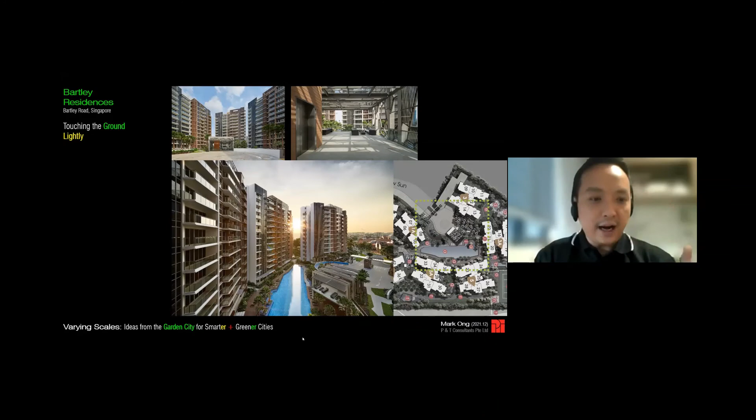So what we did was, if you drove up to the site, this would be the drop-off porch, and you arrived at the landscape pavilion. If you got off the landscape pavilion, you would end up here. And if you walk towards the end of the landscape pavilion, you would find that this pavilion is basically perched over the swimming pool. We designed the pool to appear as if it was cracked open from the ground.

This is the brochure perspective. I'm happy to say that we were able to execute our vision. This is the pool, as per done in the marketing perspective.

The car parking is behind these fountains. This is what it looks like during the daytime, and this is what it looks like during the nighttime.

Now, the buildings, as they were arranged facing the street, we also tried to be sensitive. We did not want them to appear like a wall. The street is quite busy, so we did a very gentle twisting and turning of the building so that you mitigate the feeling of being head-on to the street, absorbing the noise and dust from the street with a subtle tilting away. I think we were able to very successfully achieve that.

Now I'll finish off with this project recently completed, called Twin Vew. It's a much smaller project, and it was a very simple approach that we took. We said to ourselves when we started this project that it was important to us that when you look at the first story plan, you would not be able to tell where the building was. And I'm happy to report that we were able to achieve that.

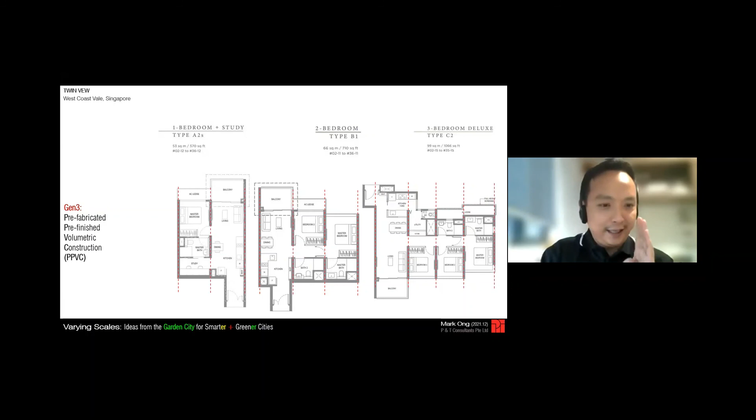And the key to doing that is to basically very neatly line up your plans. So when we did that, the thing to be mindful of is the size of each module. And the size of each module had to be configured such that you avoid needing to provide police escort for your components being brought from the warehouse to the construction site.

But what about luxurious apartments like this? This is the biggest of the unit types in Twin Vew, where you have this big, expansive and luxurious living dining room. So what we did was a hybrid system - the bedrooms and so forth basically used the PPVC, and we did cast-in-situ conventional construction for these big spaces.

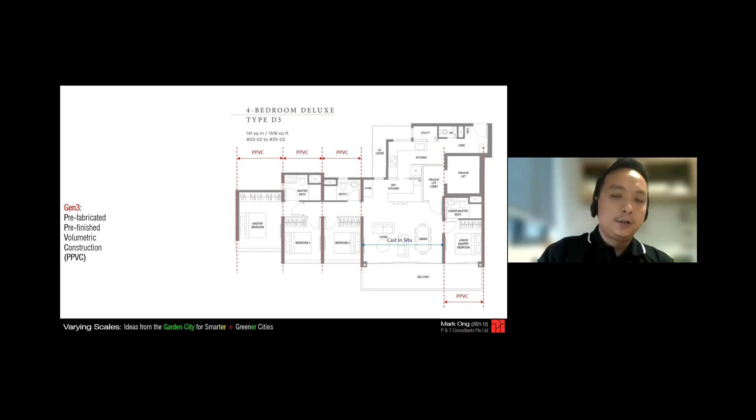I'll finish off with a video recently done by the developer. Lower the volume, okay.